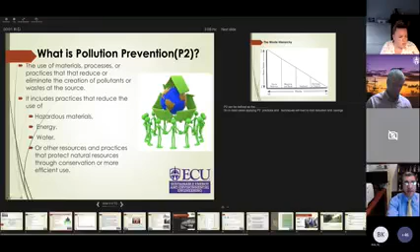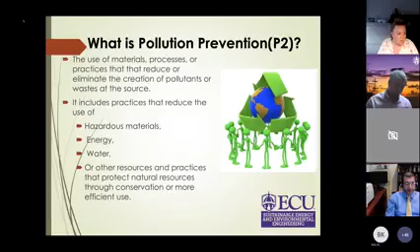Hello, actually Tarek, can I interrupt you one second? You're in presentation mode. We're seeing your notes. You mind swapping displays? Oh, so what do I do, this way? No, go back into present. So where is present? You can go to the bottom right, or start your slideshow. Oh, this one? Yeah, that one should work. Sorry about this. In the upper left, click swap displays. Okay, sorry about that. There we go. Thank you. I didn't have a lot of notes anyway, but thank you for helping. So I was actually here, right?

So I was talking about pollution prevention and the cost savings that accompany pollution prevention practices. This is well known, the hierarchy of pollution prevention, something I like to show all the time. First we start with source reduction and pollution prevention to reduce waste, and that's what we recommend most of the time to manufacturing facilities. Before you make any changes, start by implementing source reduction and pollution prevention practices. The priority goes from high to low: source reduction, followed by reuse, then recycling and treatment, which is not really part of what we recommend when we do energy assessments and pollution prevention in facilities.

In general, pollution prevention can include anything from fixing leaks, very simple stuff, to process modification and material replacement. It can be low cost or high cost strategies. The implementation, which is the most important part of pollution prevention, also varies from easy to difficult. I can give some quick examples of simple things that won't cost money and will highly reduce waste and make a lot of savings.

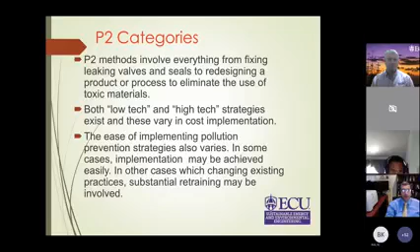So these are some practices that can be easily implemented, reduce pollution and save money at the same time, and it won't affect the quality of your products. I know many people are interested in quality. Their main concern is keeping the cost of the product low and the quality high. Here's another example, and this is something I like to show every time I talk about source reduction and pollution prevention.

The weight of the 2-liter soft drink bottle. According to this source, it was 68 grams in 1977, and recently it's about 50 or 51 grams. This might be a small mass reduction, like 17 grams. What's 17 grams? But the production of soft drinks is about 34 billion gallons a year worldwide, and the United States is consuming 25% of this. Not all of them are 2 liters, of course, but some of them are.

There are sources showing that by just reducing 17 grams from the 2-liter bottle, you save hundreds of millions of kilograms of plastic per year. We can consider this to be source reduction. You eliminated the use of the materials and you save money because you don't pay for raw material to make the same number of bottles. You pay less. As I showed in the definition above, energy efficiency could also be considered one of the pollution prevention practices or source reduction, just eliminating the use of energy.

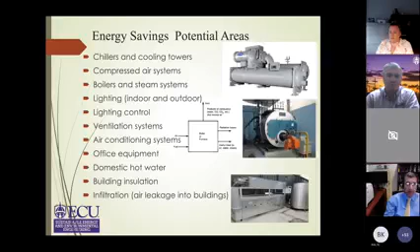Also, in compressed air, for example, compressors: fixing leaks, reducing the operating pressure of the compressors, using synthetic oil in compressors, having a maintenance plan, using V-belts or efficient belts. All of these recommendations are now well known. This actually will have a big impact if you consider all of these simple practices. You end up having good savings and efficient use of the equipment. So that's for the energy part.

That was a quick introduction about source reduction and pollution prevention. Now I'm going to show some examples about pollution prevention, and also some examples about energy savings. I chose one example, fabric dyeing, because I did this audit around 1993, 94. I chose this example because it's a big facility, so you see the clear impact of implementing pollution prevention, and the concept was relatively new at that time. So I chose a fabric dyeing and finishing facility.

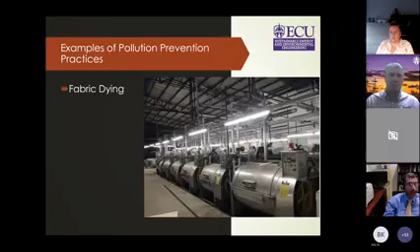This is a big facility with a lot of water and steam consumption. They use a boiler in this facility that generates about 6 tons of steam per hour, and this is really a huge size of boiler. In their production, they consume 37 cubic meters per hour. This is like 9 or 10,000 gallons per hour of water, in addition to the steam. So per day, we have about 450 cubic meters of water used per day.

So of course, this will open an opportunity for us to jump in and suggest some savings. When we introduced this technique, it was relatively new; now people are aware. We're still recommending reusing water, and this type of recommendation is still working fine. This is a huge facility, as I mentioned, and what you see right now is just 2 washing lines.

So they have in their production line 2 washing and rinsing lines. One is 8 steps, one is 6. So I'm going to talk about the 8 steps. The one in the left, this is the flow chart we used to do when we audit the facilities, do the environmental auditing for the pollution prevention.

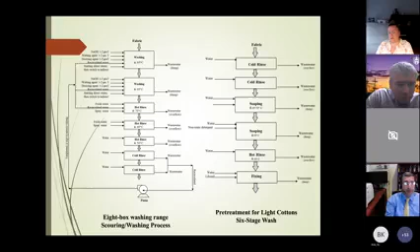The wastewater here will be just by dumping the 2 tanks frequently every day into the sewer system. They have wastewater treatment, of course, so they have to treat this amount of water. But the rest of the tanks, the other 6 are overflow, so the water is running continuously. And as you see, also the third tank is about 70 degrees, fourth one is 60 degrees, 50 degrees. So most of them are being heated by the steam.

The company at that time was using the water from the last three tanks, and putting some of this water back into the washing tanks because this water is usually clean. And this practice, by the way, can be used also in metal finishing when you do degreasing and surface cleaning or pre-treatment before you do painting or before you do electroplating. So this concept could be used too, because we take the last tank, which has the cleanest water, and then move it back to the first tank.

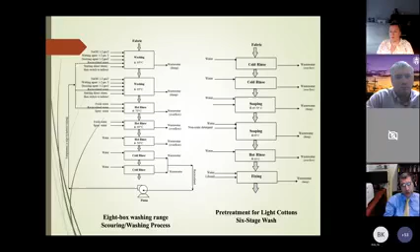So this is a sketch of the current situation at this company, and that's what you see right now. So what we see is just taking the water from 3 tanks, 6, 7, 8, and put it back onto 1, 2, 3. So what we recommended at that time is 2-stage. So taking the water from tank 8, put it back to 7, and then back to 6, and then let it go to the wastewater treatment, and then start at 5 and move it backward to 4, and then 3. The reason we do this is because these tanks were actually running by overflow. So there's overflow, continuous flow of water.

And by doing this, we reduce the consumption of water severely, big consumption. Reduced just by implementing this. And we kept the quality of the product the same because that was the concern of the company. And this is just water now. We reduce the water, and the water is contaminated with some chemicals too, which needs to be treated at the wastewater treatment. So we reduce the load of the wastewater treatment. We reduce the chemical load.

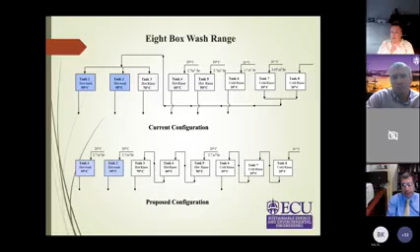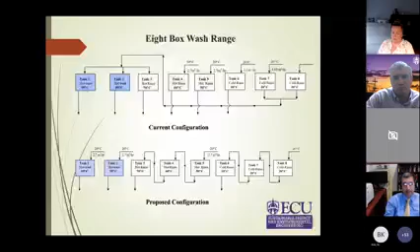We also saved some energy here. It's clear because these tanks, they have 50, 60, and 70. They are actually hot or warm water. So there was some energy savings. And of course, I'm not showing any calculations here, but these are done and showed a lot of savings. What I'm showing you now is just a summary of the table of recommendations for this company. Not everything we recommended at that time. So the water, reuse of the water is the one in the middle.

So we were able to reduce about 7,000 or 7,600 meter cube per year, and reduce of course, the wastewater treatment load. And we reduce about 61,000 natural gas. Other recommendations here, implementing revised print shop, that's pollution prevention. This actually is another option. I need time to talk about this, but by implementing something like this, just having different practice or implementing something new, you reduce the biological oxygen demand, total suspended solids, COD, etc.

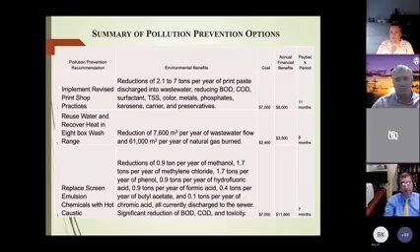And the last one at the bottom is just replacing one technique with another technique. So we replace the technique used and replace the chemicals with hot caustic chemicals at that time. It also gave us good savings. And as you see, the payback period in the right side is less than a year, 11 months, 8 months, 7 months. We see this a lot in big companies. We don't see this in small companies. So the impact always in big companies is big.

I'm summarizing the findings for this facility because by implementing the pollution prevention and source reduction, we were able to reduce the chemicals, total suspended solids, biological oxygen demand, chemical oxygen demand, reduce the discharge to the wastewater, reduce the dye to the wastewater, etc. Reduce the use of steam, reduce the water. So as you see, it's mostly reduce, eliminate. So that's the first part of the hierarchy of the pollution prevention and source reduction.

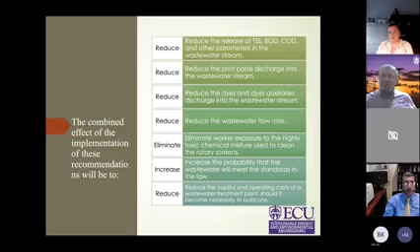So there are different techniques for eliminating this way of cleaning. One of them is minimizing the need for cleaning. It could be implemented in breweries and wineries and multiple applications, not just metal finishing, by having the same product in the same tank. So we'll have to look at the production and the plan for production.

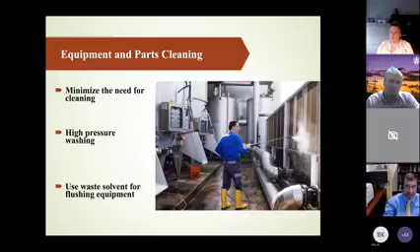The last two examples will be about wineries and breweries, because in North Carolina we have nearly 200 wineries. They produce almost 2.4 million gallons of wine a year. The process is typical of most wineries: destemming, crushing, fermentation. It requires some heat, some sterilization. So it is related to pollution and also to energy, so there is a lot of potential here.

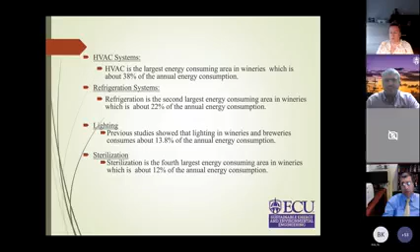If we look at the energy consumption in a typical winery, based on the published research, 38% of the energy is consumed by the HVAC, including the coolers and freezers, refrigeration system, lighting and sterilization. The last one is 12%. Refrigeration system is about 22%. So this is just a rough or average estimate of the major energy consuming units in a typical winery. These are the areas we look at when we audit a winery.

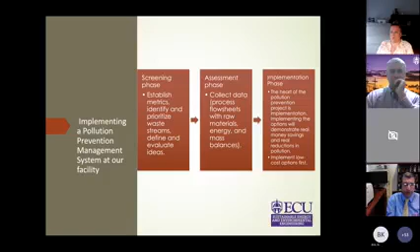And the last thing I want to conclude with is, we have seen big investments in some recommendations. So what we really tell people to do is start with no cost, low cost, monitor savings, see and measure how much money you saved, and then move to the next step, which is implementing the medium cost and then the high cost. So we move from no cost, low cost to medium to high cost.

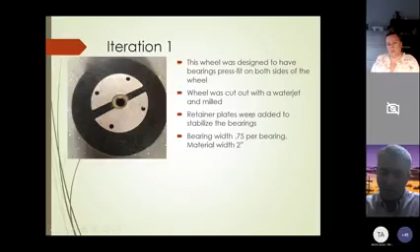This wheel has two bearings that are pressed in on each side, and originally this was water jetted on the outside, milled on the inside, and has 4 holes drilled in. And it was really easy to water jet that center hole because you could just put the water jet on it, let it run, and then press fit the bearings into place. Well, what we found out is that that bearing's not going to stay because of the pressure for the press fit, and retainer plates have to be added on the outside to stabilize the bearing. So this was the first iteration in this system.

In the second iteration, the wheel was milled completely, and instead of water jetting the center all the way out, we left a little, picture it almost like a washer inside. There's a space in the middle that the bearing was able to rest on to keep it stabilized, so we didn't have to use those retainer plates anymore. So for half of our wheels, we were also able to reduce those 4 bolts that bolted the system together. So the 4 retainer plates, each one was about $10. There's 4 on each unit. It's about a $40 savings. The 4 fasteners on one side was about a $5 savings.

There was a reduced assembly time as well that came into place. And then there was less wasted material, but that cost was pretty negligible. There was also a cost for design modifications. We had to go in and of course, program the mill to do the new job. And then we had a redesign of an outer bushing as well, because now that the bearings were set further apart and not press fit as deep into the material, we had to redesign another bushing. And that was fairly simple.

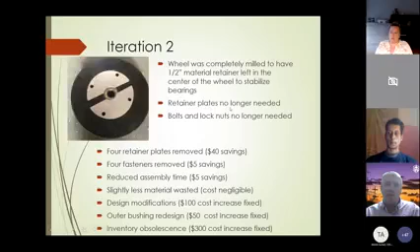And then we had obsolete inventory of those retainer plates that we were no longer going to need. And actually in the picture here, this is an iteration 2 wheel, even though it has the retainer plates on it. Those are just some spare retainer plates. So it's pretty easy to calculate the break even in number of units here. So here's the result of what happened. So there's about $450 in implementation costs and a $50 savings per unit, or about 9 units. And for my company, that's pretty significant.

But it was also better for the end customer. Here's some other minor considerations that for me didn't make a huge impact, but at your company, you might want to think about some of these. So the availability of the mill versus the availability of the water jet. As you add more product lines, you have to keep some inventory of the old stock keeping units for the customers to be able to use. So there was an increase in inventory holding that happened there.

This one happened to be a more reliable method, but reliability, when you change anything on the product, is going to change somewhat. So this increased reliability. And then we actually had some reduced shipping weight. That was pretty minor for this change. And then we figured out not only could we do this better, there were a lot of things we could change that would really have positive impact for the customer.

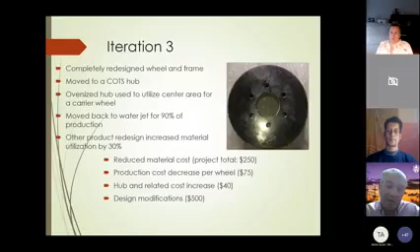We did have some design modifications, 500 total, not just for the wheel. The entire system redesign cost us about $500. So this broke even in about 3 units. So this one was really a no-brainer. On average, about 125 material costs per wheel and 75 production cost reduction. So that was pretty cool.

The real value here, though, really had nothing to do with the materials. We were able to go back, and of course the savings was great. We were able to increase our price by about 4% because we felt the product better met customers' needs. We still offer the previous wheel design and product, and we have only had 1 sale of that product line. All other sales have been with the new design. It was a first in the industry and really received a lot of attention from a lot of the professional users. Customer maintenance decreased about 50% annually, so customers are thrilled with it. The redesign really does a lot of good things for the customer, and sales increased substantially because of that.

So the improvements aren't just, the big takeaway here for me is think about this holistically as your entire business, how it could affect each part of your financials, how it could be a sales driver, and constantly have that mindset for improvement on your product and around your processes to produce the product, to think about how it's going to better serve your company and your financials and the end customer.